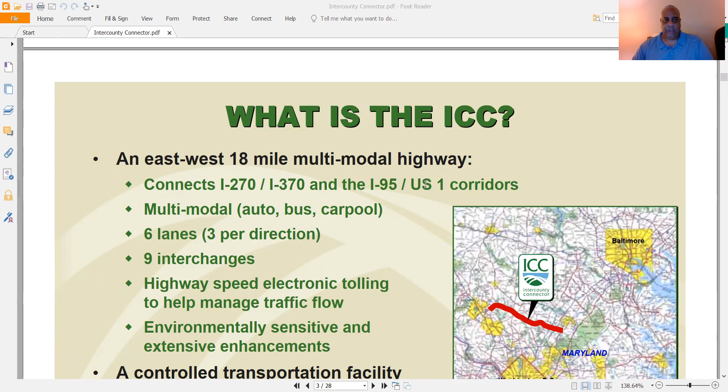All right, I'm going to go into the project and give you this information. What is the ICC? Well, the ICC is an east-west 18-mile multi-modal highway. And it connects I-270, I-370, I-95, and US 1.

This project was actually part of the Washington Outer Beltway. Again, it's multimodal. When we deal with multimodal, we talk about the vehicles that are going to be traveling on this facility. So auto, bus, and carpool will be traveling on this facility.

And this is all part of the planning. How many lanes is it going to have? It's going to have 3 lanes in each direction, so you're going to have a 6-lane divided highway. It's going to have a median in the middle, with 9 interchanges.

Now, when I get into my transportation part, I'll give you more in-depth information on what an interchange is. So I'm going to give you a brief version right now. An interchange is where you enter and exit a highway.

Now, also part of the planning of this highway is: is this expressway or facility going to be tolled? Yes, it is. And it's going to have highway speed electronic tolling to help manage traffic flow.

Tolls used to be a hindrance because you had to stop and pay money. Then we got rid of most of the tolls and we went to an electronic system, what we call EZ-Pass. Now you have a system that actually reads your transponder and you can go right through without ever stopping.

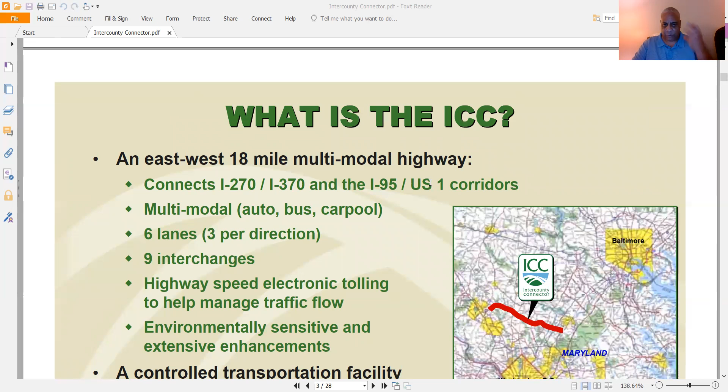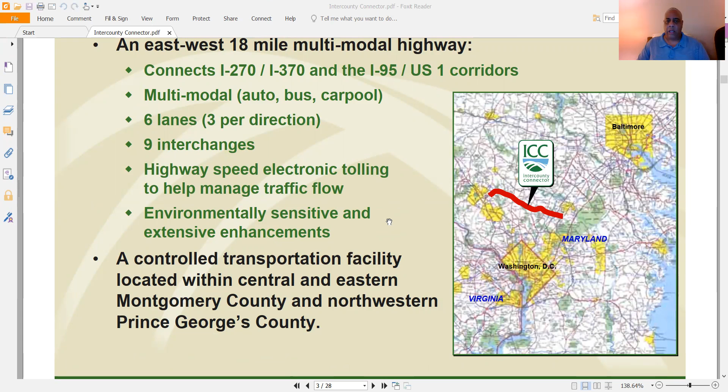Then you have to look at the environment. So what we have with this project is a controlled transportation facility, which is located in eastern or central Montgomery County and northwestern PG County.

Again, when you deal with planning a project, one of the things you need is a map. And you see this map right here. The good thing about maps is they have colors. The colors are going to tell you what is going to happen. Okay, you see the colors right here. Here's the road, Maryland 200.

It goes all the way right down to Route 1. Now you have I-95. What's going to go on I-95? Well, if you look at the map, what's going to go on is they're going to do some interchange construction.

Now, one thing you need to understand about a map when you read it, you need to know what the legend stands for. Now, this is a legend that has different contracts. So contractor A is all in green, contractor B is in purple, contractor C is in yellow, contractor D is in blue, and contractor E is in, I call it, orange brown.

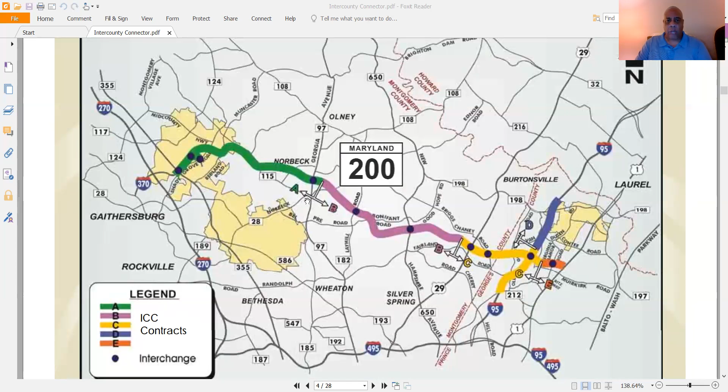Now, what are the blue dots for? The blue dots are for the interchanges.

And now, when you design a project, you also have to indicate the purpose and need so people know what you're talking about. The purpose and need for this project is to increase community mobility and safety, improve access between economic growth centers, known as smart growth, provide infrastructure needed to support local land use in Montgomery and Prince George's County, Maryland, enhance environmental stewardship, and advance homeland security.

Again, you want to provide pictures when you're doing a presentation because individuals want to know what you are presenting.

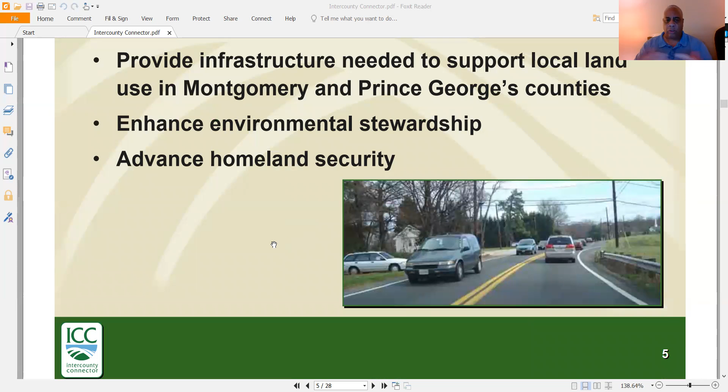You also have the history. Again, part of the ICC was supposed to be the Outer Beltway, and this was between 1950 and 1968. Then between 1979 and 87, there were studies, but no final design. From 1992 to 1999, the project was put back on the table because studies were renewed, but they were only preliminary studies. And in 2002, ICC was named the top transportation priority in Maryland.

And then in 2003, the United States Department of Transportation places the ICC on the Project Streamline list. SHA, if you don't know what that stands for, stands for State Highway Administration, part of Maryland. Then in 2006, they did the final EIS, which is an environmental impact statement.

And guess who signed the record of decision, which was your final approval? The FHWA, which is the Federal Highway Administration.

When you deal with projects, you have different milestones, like the initiation of study efforts, publication of the draft environmental impact statement, contract A, which is an informational meeting, and your FEIS, which is your final environmental impact statement, and the record of decision. These are all dated documentation.

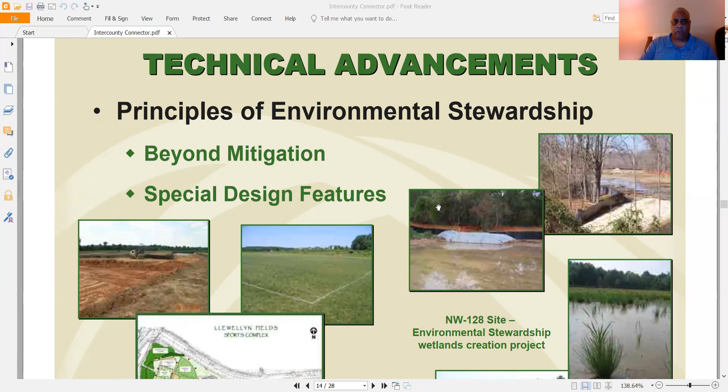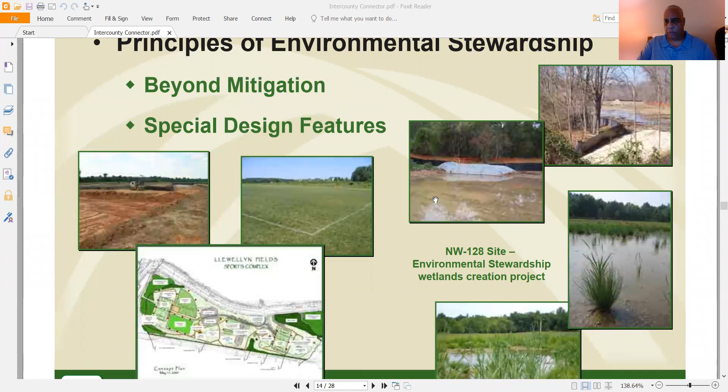In your technical advancements, talk about being beyond mitigation, special design features. Now, this is more or less on the capital project or the civil side, but if you go into any other branch of engineering, you're going to go through the same process.

You have your maps. Your maps are very important because you need to know the beginning and the end of a project.

Technical advances, there you go right here. You see what I was talking about? You want to be able to give your audience a visual of what's taking place.

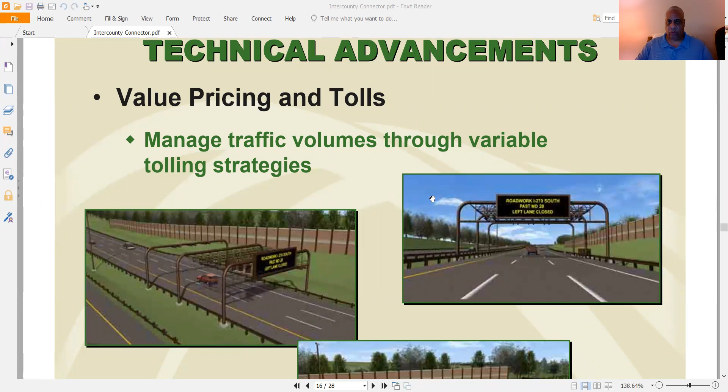When we deal with highways and byways, we talk about tolls. And this is what they're talking about: 3-lane, you have your toll booths. Again, this is a rendition of what the highway is going to look like when it's completed.

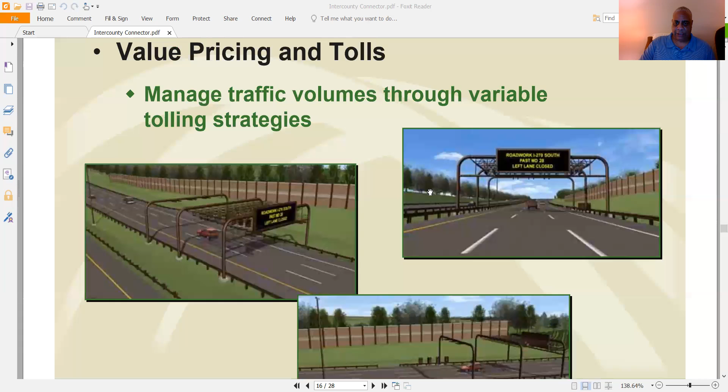When you're in managing and planning, you need to know what kind of planning and design coordination is going to take place, and who you're going to be working with. Are you going to be working with DBEs, disadvantaged business enterprises? The government does provide 25 to 30% of funds for disadvantaged business enterprises, women business enterprises, and minority business enterprises. And now they're getting into DVBEs, your disabled veteran business enterprises as well.

When we deal with any type of management, what kind of challenges are going to be involved? You're going to have to deal with the public. What software are you going to use? What contract - are you going to be doing a design build? Again, with all these projects, you have to find a DBE, disadvantaged business enterprise. Then you have to package the contract and submit it for bid. You're looking at what this project is going to look like.

Management challenges again: we deal with public coordination, the issues, transitioning from planning to design and construction. You have to explain the design build versus design bid build processes to the public. I did do an earlier video on design build and design bid build - if you want to get more in depth, go watch that previous video.

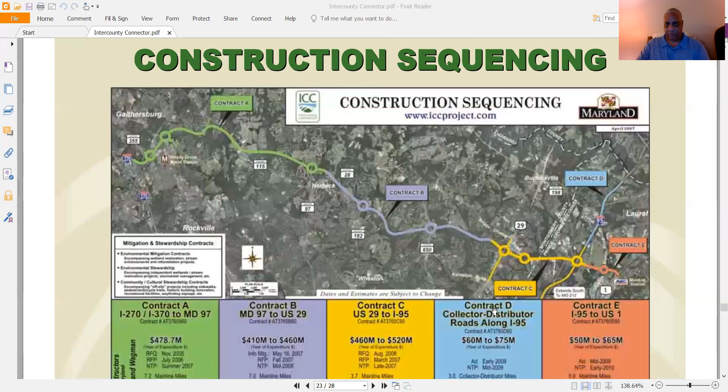Then you have your project status. During this project status, the planning was completed in 2006. The first design builder, the first segment, was selected for contract A. Also, a limited notice to proceed was issued, covering minor data gathering activities and project mitigation.

Then they moved the project team to coordinate procurement for contracts B and C respectively, and they had community meetings. When you're dealing with projects, you have to have meetings with your project and design team, and the public, because this was a big project. Remember, we pay our taxes for these projects.

And what you see here is a current schedule. What I've done is taken the information from the previous PowerPoints on design build and design bid build, and I'm showing you what it looks like when they put it together, and then they give you the bid amount. That's what you see right here.

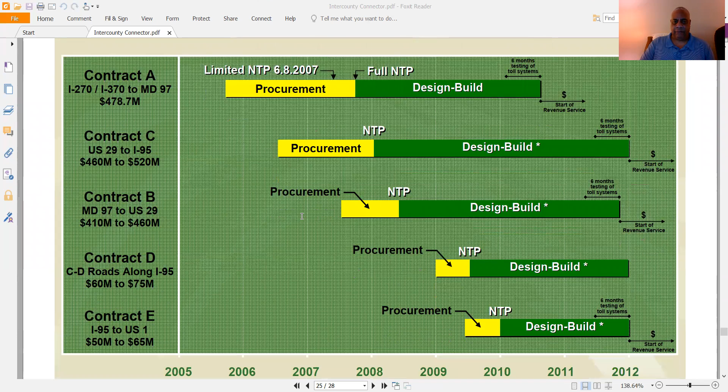Going forward, when it comes to management, you're always going to have challenges. You've got to meet your DBE goals, continue integrity of the procurement process, and operate as an efficient organization.

Basically, when you have a team, you're going to have your private public partnerships. That means you're going to have your SHA, MDTA, and GEC, which is your general engineering consultant. Your GEC is going to be the designer of the project.

And then again, environmental. Now, I am doing this from building a transportation project, but you can do this when you're an architect getting ready to build a building. You can even do this when you're building cars.

And again, when it comes to management, future involvement for stakeholders, this is the organizations. But in the long run, when it comes to projects, you want to make sure that all of your paperwork is good, because there's a lot that goes into building a project. As you see, this project is a 50-year-old project.